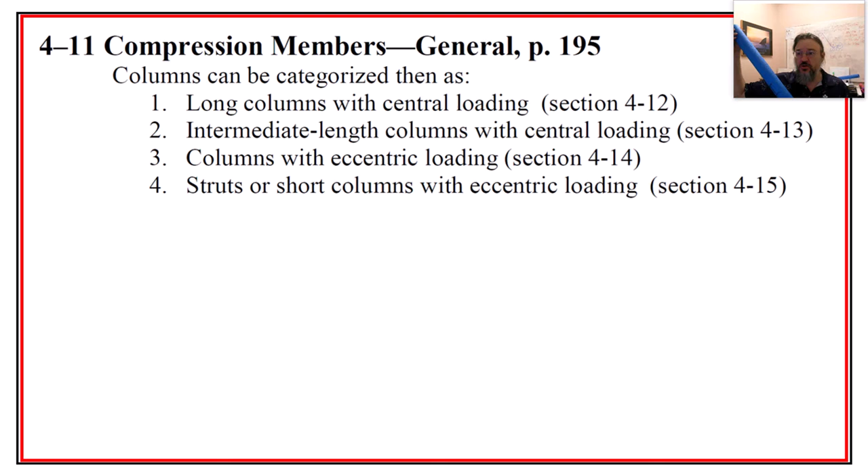So we want to see really between 1, 2, and 4, 3 categories of columns. We got really long ones, we got kind of in the middle ones, and 4 is little squatty ones. And we don't really do much with the squatty ones, but we should just realize that we could categorize them in 3 different ways. But this is the way that the chapter in section 4-11 treats the thing.

We start out with the concept of stability. This is something you probably already inherently can relate to, right? Almost everyone, when talking about stability, has this little marble. It's in a ditch, right?

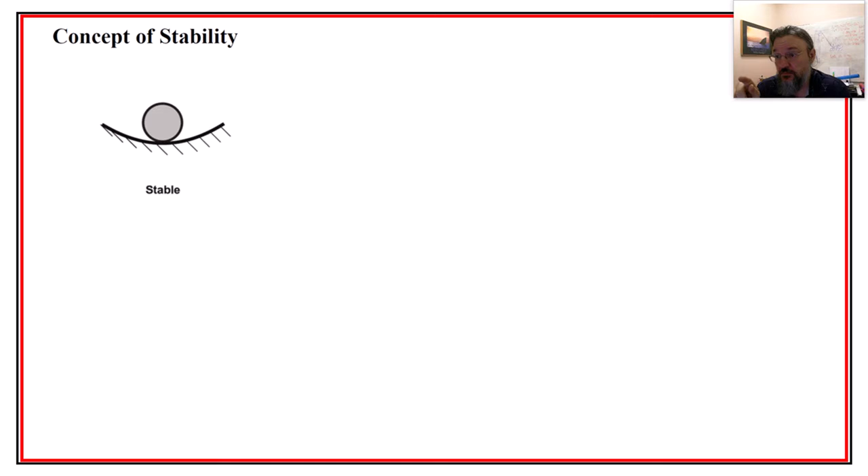And if we nudge the marble, give it a little push, it's going to roll up, it's going to roll back. And if there's some friction involved, it'll eventually stabilize and go back into its position, right? So the nature of the problem is a fundamentally stable position, because it'll self-correct. A small action produces a small effect. That's something that's stable, right?

Now here's the counterpart, the unstable situation. If the ball is now, instead of in a ditch, it's on a hill, right? If we just give it a little tap, or a fly comes and lands on it, it's going to go crazy, right? So a small action produces a large effect. That's the idea of stability.

When we take it to buckling, I think another good example is your knees, right? If a larger friend was to decide that they wanted to do chicken fights, they get onto your shoulders, and now you got to run around and fight somebody else. But if that person's really heavy and you tried to stand, you could lock your knees. But the heavier they get, at some point, boom, it's gonna buckle, right?

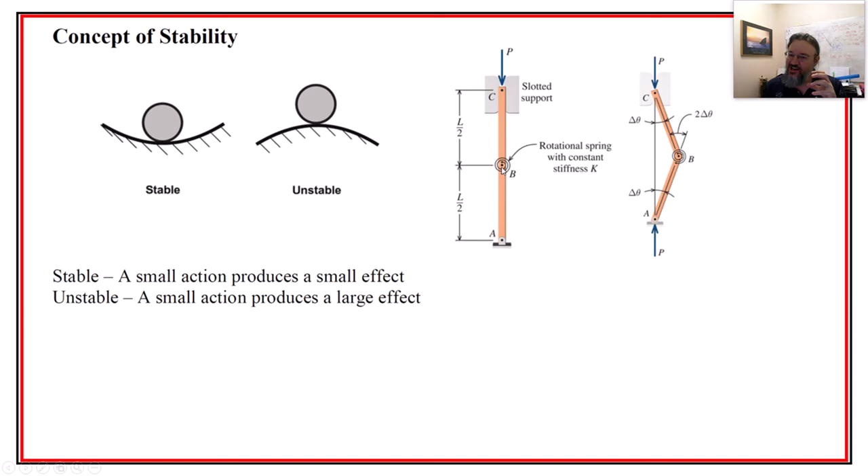So you can think about your leg buckling, right? It's fine, but with just enough weight, it goes. You can think of it like you have this little rotating spring, kind of stiffness in your knee, and you can kind of get that sense. We can figure out that at some point with a little tiny displacement, if you were to bend your knee just a little bit, it would buckle a lot sooner.

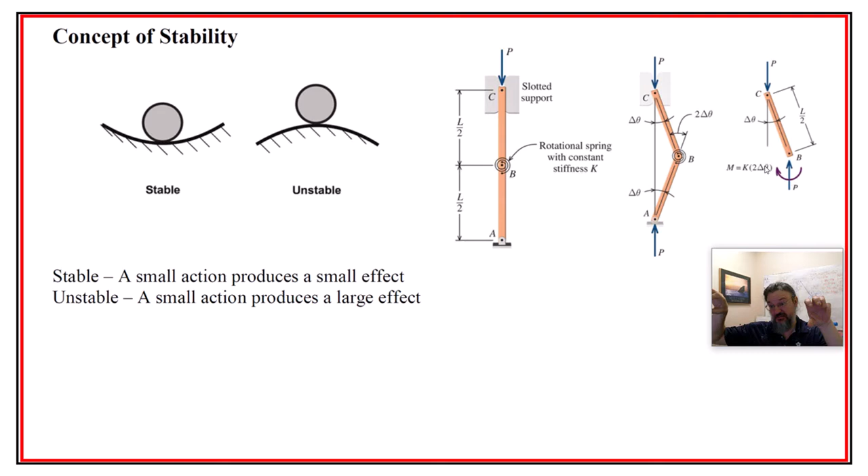That's because there would be a moment created between the deflection and the force. If you do a free body diagram, you'd see that itty bitty amount of deflection creates a moment arm, and that's trying to bend your straight leg, kind of bending it, because if you look at just one side, the force is going this way and there's a little tiny displacement right here. Okay, that's the concept.

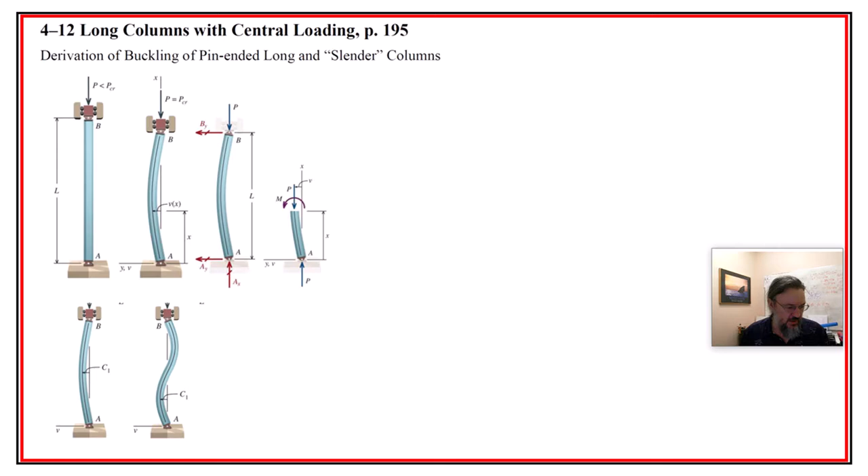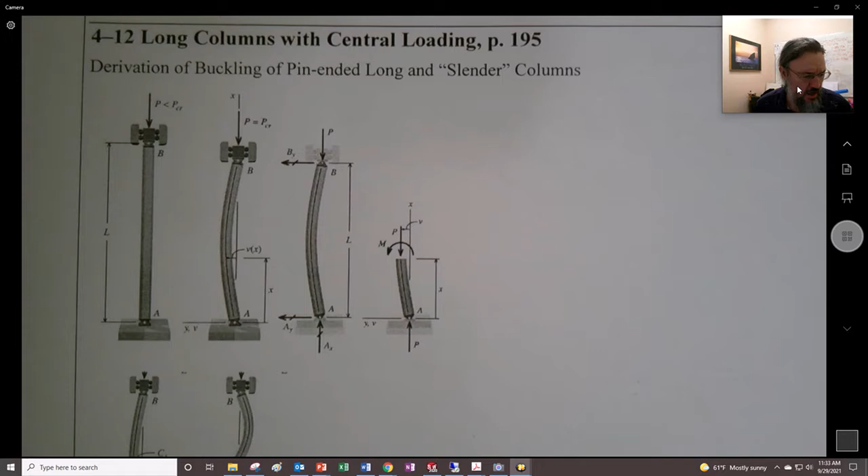But now we've got to put some mathy stuff into it. We have a good friend we introduced recently, called the Flexural Equation, and it's going to come up and be relevant again. So here you go, here are my hand notes, let me go through this short derivation. This derivation is in some ways a rite of passage - it's one thing where we can say, why did we learn differential equations, and why did you bother bringing up the flexural equation?

We did a little brief derivation of the flexural equation, Euler's equation, right? And I got this little thing pointing right at me - I'll take that out of my nose.

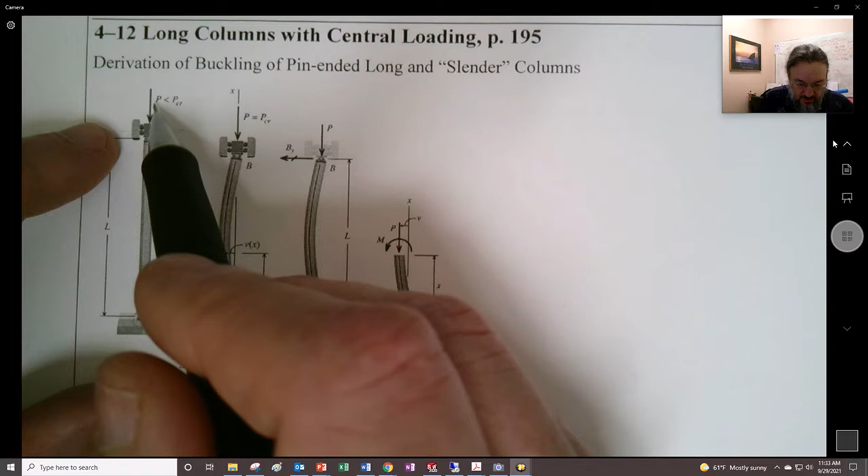Okay, so we have this column situation, and it's pinned down here, and pinned here, but it's got rollers, so that means the thing can't go left or right or into the paper or out of the paper. It can only go up and down, and it's pinned right in there, kind of like just held at a point. So there's no moment at that top point, and the same thing is true here at the bottom. So if you just press downwards, this top thing won't go side, back and forth, it can only go up and down.

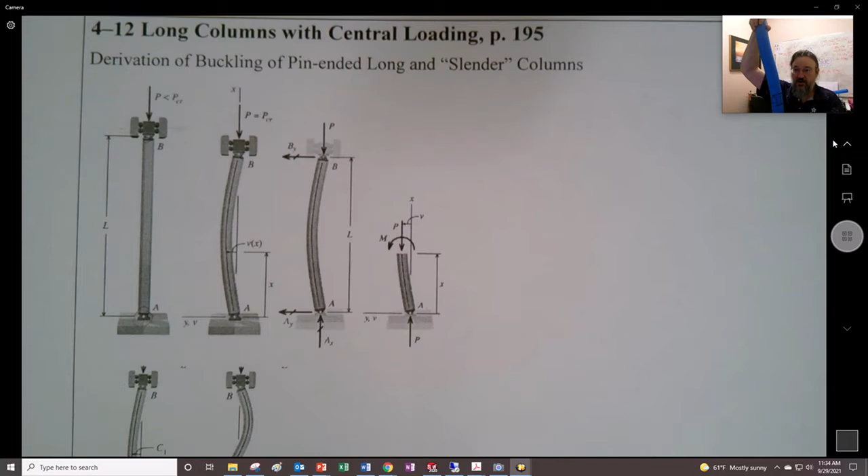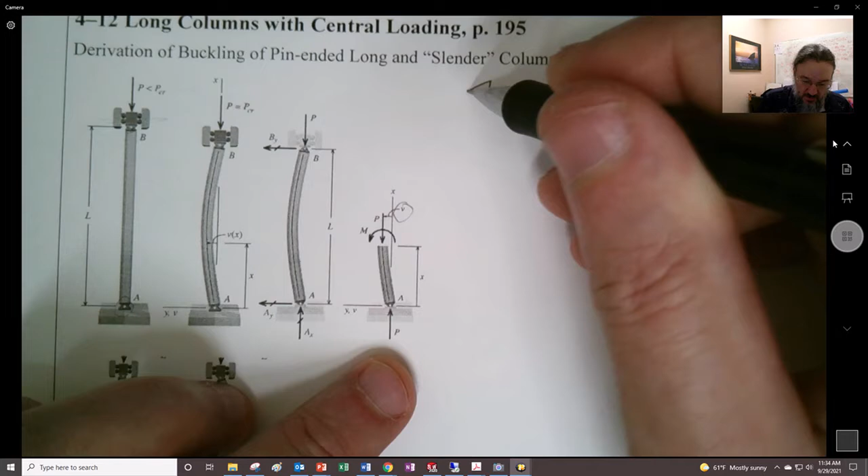So as you push right there, this thing is pinned, so there's nothing holding it up here, it's just held by a point. So let's just assume it buckles, and we could do a free body diagram here. They decided they were going to call V, in this book, the displacement. So we're doing an FBD of this, and we take the sum of the moments, and it's got to be equal to 0.

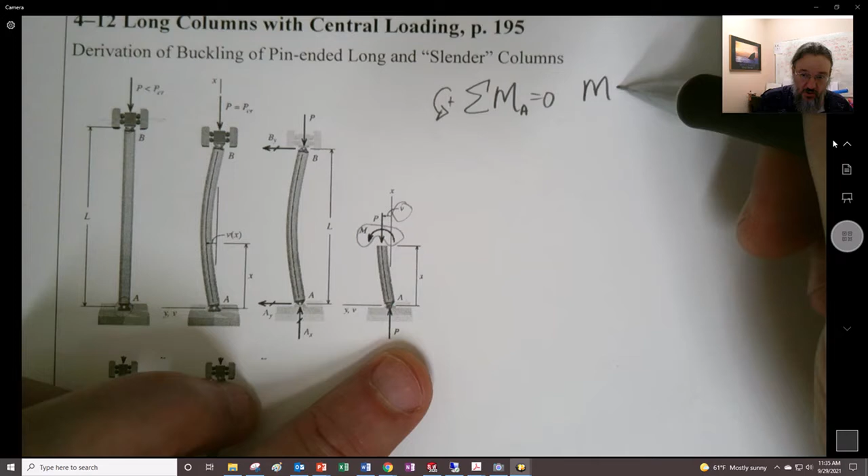So we have a moment on here, and we could figure out what that moment is. If we're taking the sum of the moments about A, that moment up here - they decided to go plus right here. So instead of going plus and minus as a sign convention, they just say this load P is going to be multiplied by the displacement, which I decided to call Y just because I liked Y better. So here is our Y coordinate right there. Instead of V, I'm using Y, but that's just the displacement at this hypothetical point being bent. We don't know any of these values yet, but we know this arrangement has to be true.

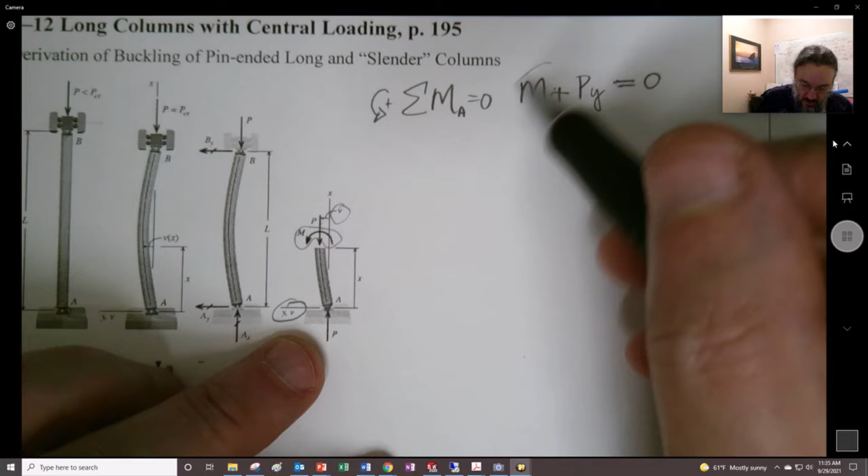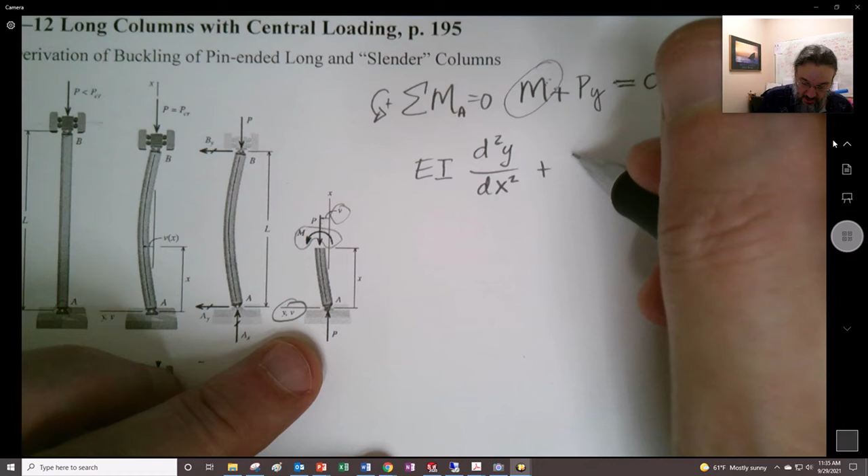Well, what we could do for this moment is replace it with our good friend, the Flexural Equation. Recall that this is the second derivative of that deflection with respect to its axial position, plus Py equals 0. So what we've just done, from an FBD and the Flexural Equation, is set up a second order differential equation, and we usually like to arrange it so that we get rid of anything on the front side of that.

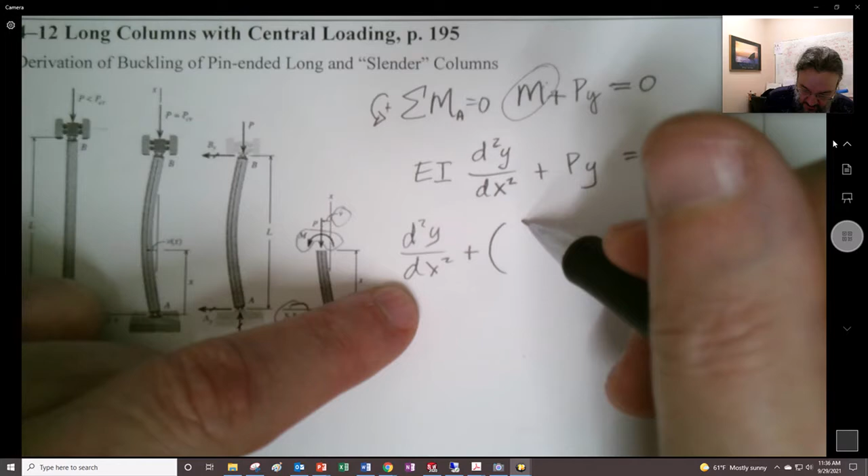And I'll put this in parentheses, go P over EI, y equals 0. Now, the reason why you take differential equations is so that I don't have to teach it to you.

But we know the solution to this very fundamental second order differential equation, or I hope we do. But I will teach you the thing that made it most clear to me when the light bulb came on and I understood what we were doing in differential equations. I made pretty good grades in undergrad, but I didn't really understand it.

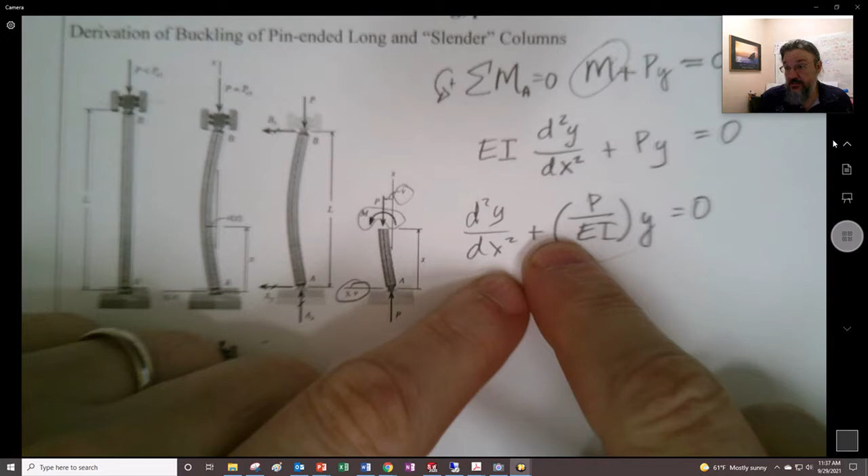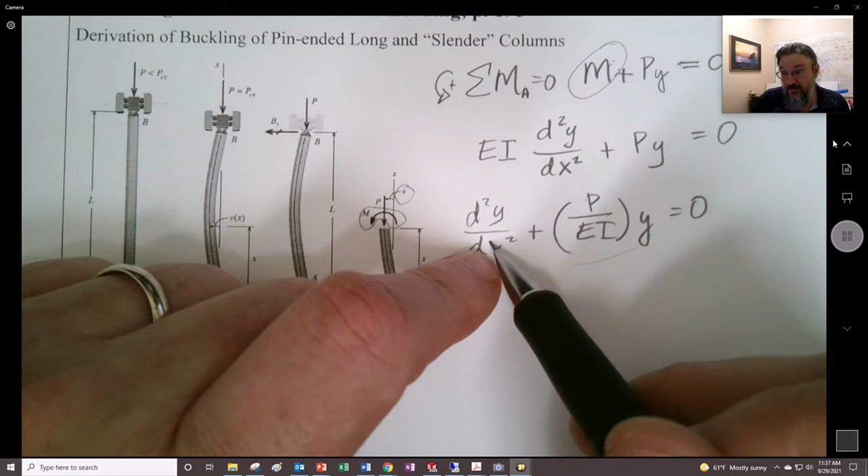It was when someone said all differential equations is a mission to try to figure out what kind of thing does that. When you have the original thing, but then you take the derivative of it twice, when you put them together, it will turn into 0. What kind of thing behaves that way?

And the answer is it's a sine function. When you take the second derivative of a sine, you get a negative sine, and you add negative sine and sine together, and they equal 0. So if you have something, y equals sine, with some good junk on the inside next to the angle thing, and you take a derivative of it twice, and add it back to the original thing, it's going to cancel out. It's going to go to 0.

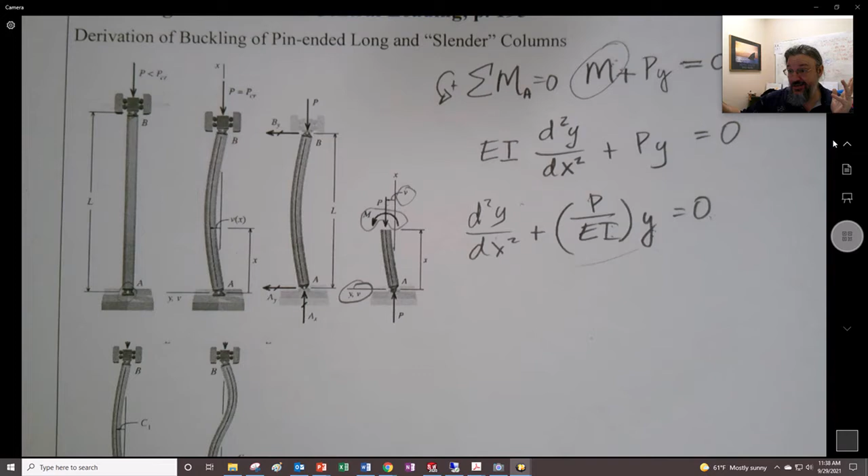Well, a cosine will do that too, but a sine and a cosine are actually the same thing, just shifted over 90 degrees. Or you could even say e raised to the something, with an imaginary number in the exponent. When you take the second derivative of that, it will be negative e to the thing. Add them together. But it turns out e raised to the imaginary number is actually a sine and cosine added together. They call it the Euler equivalency.

So they're all the same thing. They're all a sine function. It's the only thing that exists in this world that when you take the second derivative of it and add it to the original thing, it will cancel itself out and turn to 0. So it's the only solution to this that's possible.

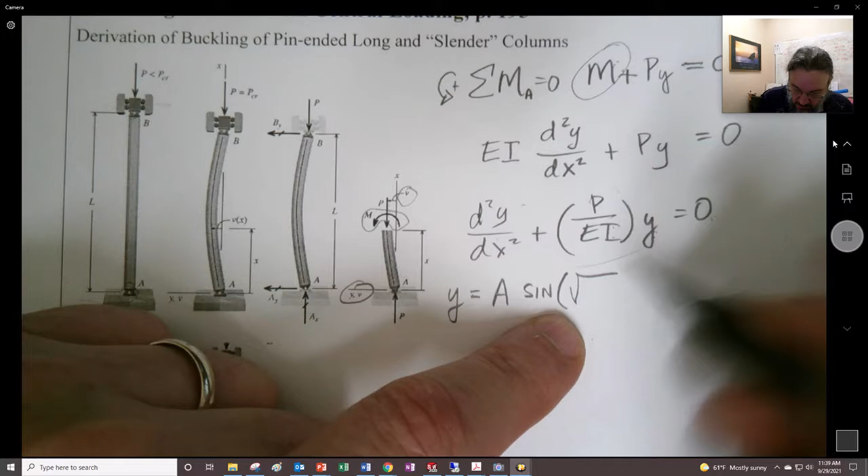Now, as a general solution, what they like to do is cover all the bases. So we stick a magnitude in front of this, and we take the sine, and this has to be the square root of it. It's got to be the thing on the inside, because it's going to fall out when you take the derivative of the thing twice. It's going to be multiplied by itself and become this, so it's got to be the square root of P over EI. I hope what I said had some amount of usefulness to someone out there.

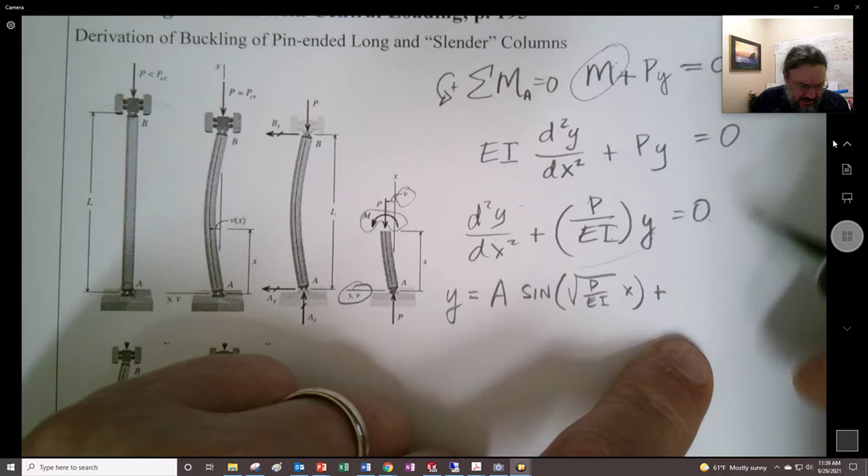So anyway, it could be a combination of a sine and a cosine. It's possible in lots of different scenarios where this could be a thing. So this is like a generalized solution to a second order differential equation, but we could start making it a little bit more specific to our situation.

And the way that we do that is with boundary conditions. We say we know at x equals 0 that it's not allowed to deflect in the y direction, that y is equal to 0. And if we say x equals 0 right here, if that's true, this can't be true, because cosine of 0 is going to be equal to 1.

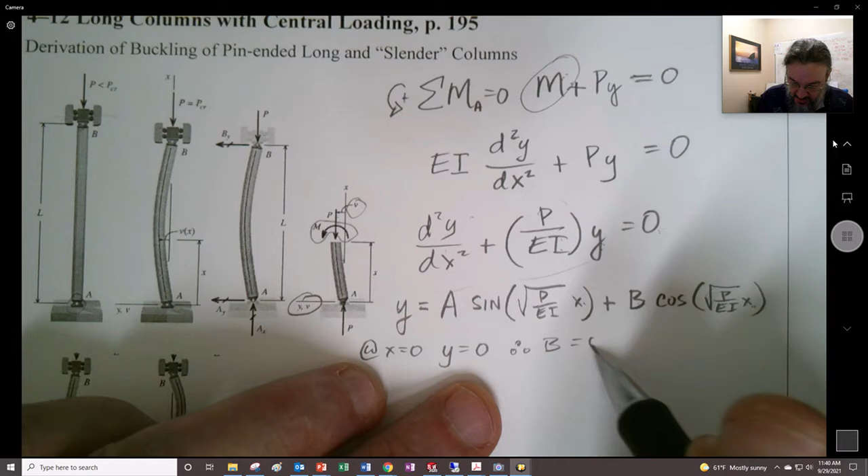So that's b. But if we take the sine of 0, that's going to be 0. So we have a situation: if we put 0 in here, it becomes 0; we put 0 in here, it becomes 1, and this has to equal 0. Therefore b must be equal to 0. That's the only way it can happen. We don't have any choice. It's just a fact. It can't be.

Okay, so all of a sudden, we got rid of the cosine. That was nice, we didn't want it anyway. And then we have the other boundary condition, that at the length of the thing, all the way up here, at x equals L, y also has to be equal to 0.

Right? So when we do that, for the only way that can be true, it is not going to help us figure out what A is, but it will tell us that the inside of this thing right here, when x equals L, has to be some multiple of pi. Now, one of the solutions is possible, is that the square root of P over EI times L could possibly equal 0.

Square root of p over EI times L could be equal to 0 to achieve this, but that's not possible. So that's not a solution.

Another solution is pi. Pi is the thing that's when you're inside here, right? So it'd be this right here, when you put it together, could be 180 degrees. That would make sine 0, and then yes, it would obey this thing right here. Another is it could be 2 pi, right? It could be 360 degrees.

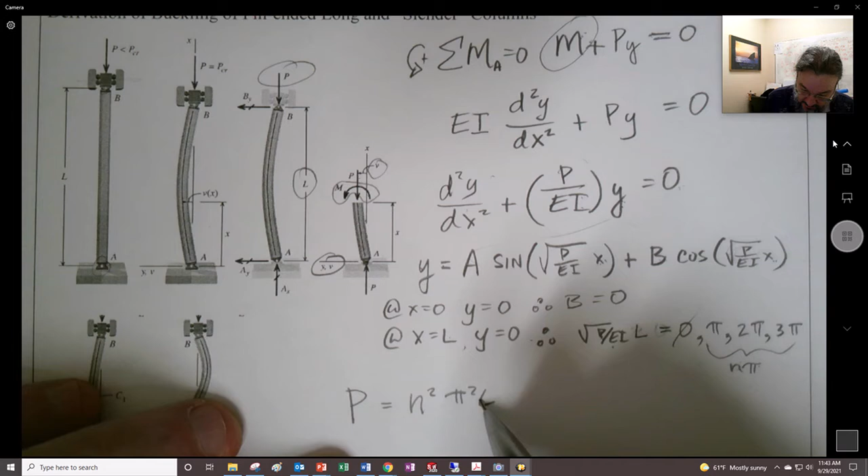So do I want to bother with this? I guess I could just say here, we say that p, I'm going to solve for p, because that's the thing I'm about to know. When does it buckle? I want to solve for p. And what I end up finding is I got n squared and pi squared, and I have EI, and then I also have L squared right here.

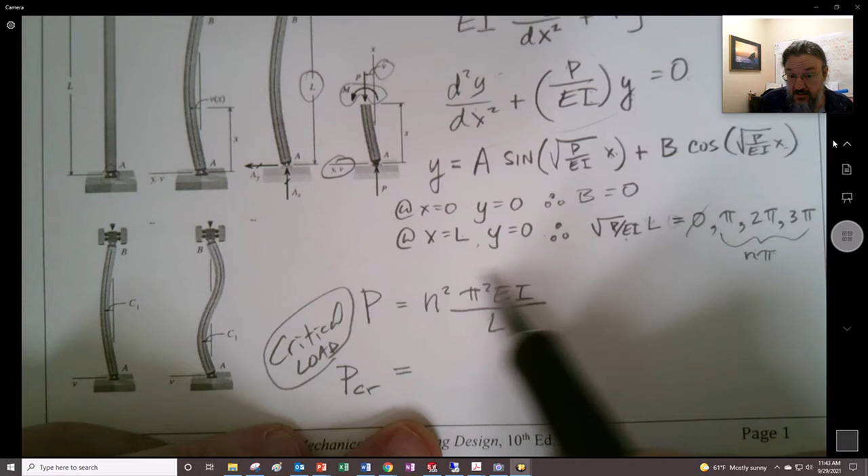So this says PCR, we're going to call that the critical load. And that critical load is now going to say, okay, so one thing that we do know here is that when n is equal to 1, this is going to be the smallest load possible, the smallest load at which this thing fails. And so we get pi squared EI over L squared.

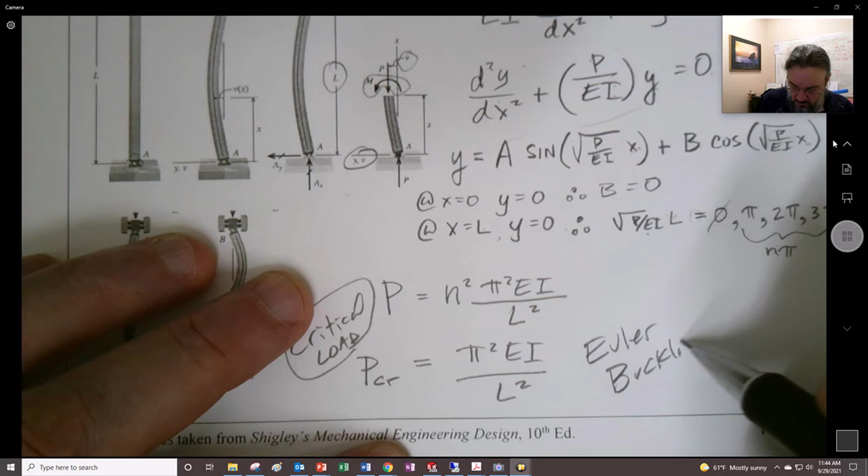Okay, and we're almost done with this video, and we'll move it on to the next one. But this was just for this pinned boundary condition. So by the way, this is the Euler buckling equation, or we call it Euler buckling, right? We're going to add something to this just to make it a little bit more useful in other situations.

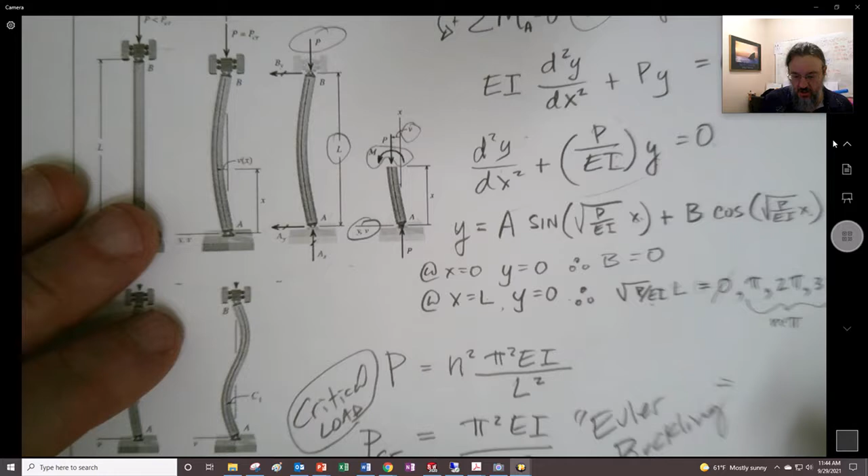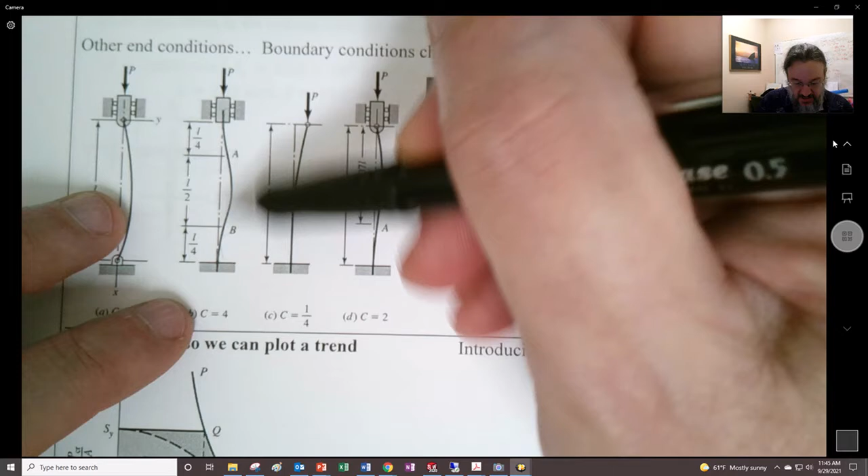So these boundary conditions that we had right here might not be the only boundary conditions. We could take a look at these particular types of things. So here's the boundary conditions we just did, but they might be fixed at the top, right? So they might be fixed in such a way that this thing can move up and down, but there's no moment. So one of the conditions is now the slope has to be 0 here.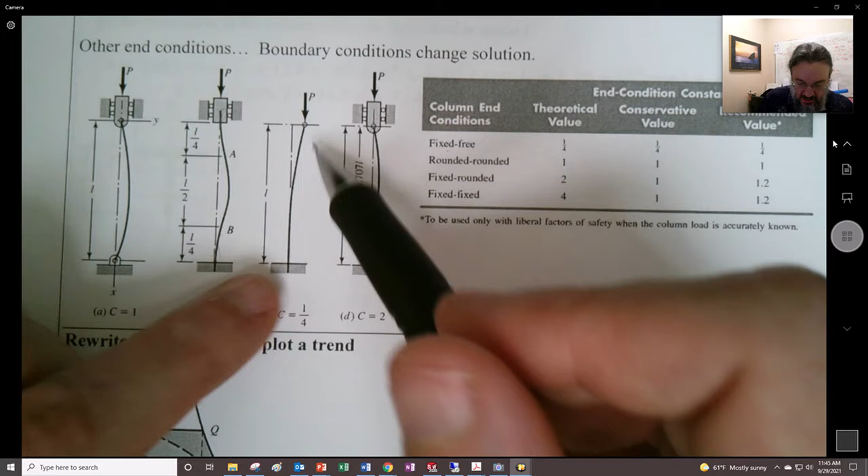So those are boundary conditions that could exist, right? We could also have one where this thing is allowed to go side to side, but the slope has to be 0 back down here. And then another one where it can't go side to side, but so this is pinned fixed right here. So we have fixed free, that's this situation right there, fixed free.

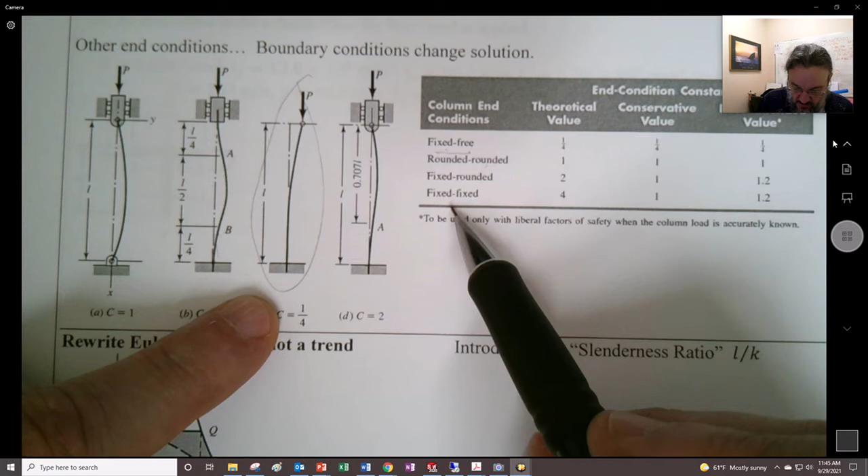We have, they're called rounded. I'm trying to think of what the heck they mean by rounded. I'm trying to see where's rounded. That's just occurring to me. Like, I think that's pinned. Yeah, that's what that is. That means pinned, which is this is the typical situation that we have, pinned.

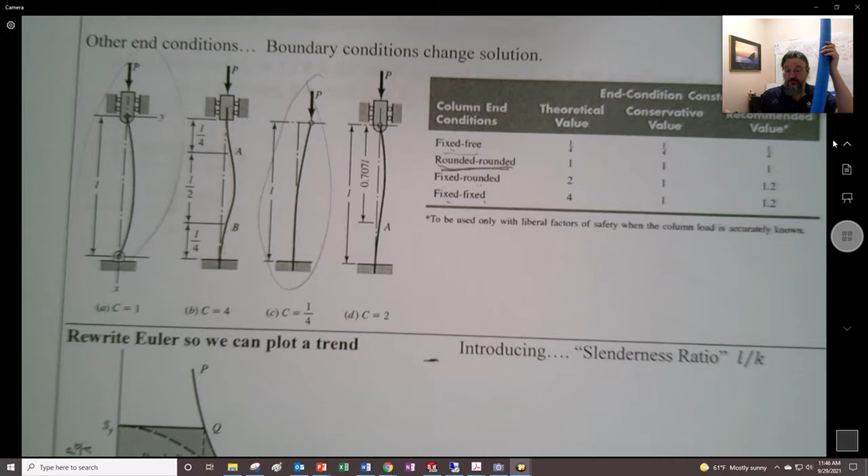And then we have fixed pinned, that's this guy. And then we have fixed fixed, which is this guy, right? So let's see, fixed free, you can think of that as just cantilevered, right? That's just this thing, and you put a force and it can go over to the side, right? But the base is held fixed, it's cantilevered.

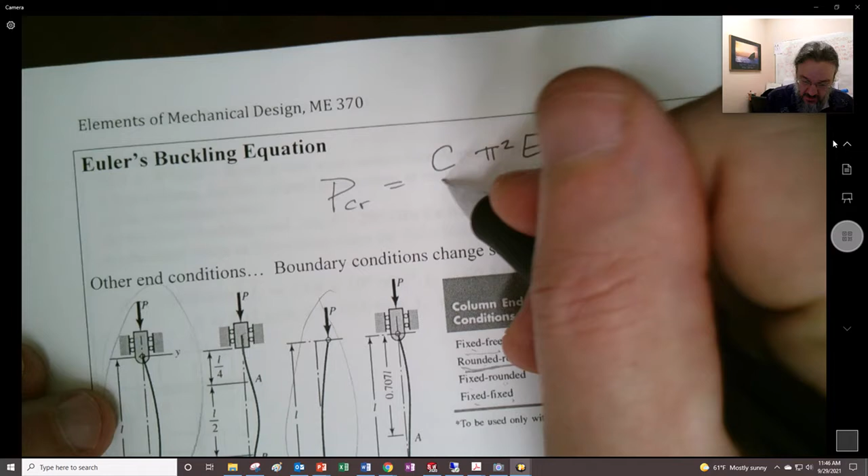All right, so these are like end conditions, and we could have come up with some things for boundary conditions, but we'll just accept that the critical buckling load right here is going to be equal to some C that we're about to just talk about, pi squared EI divided by, I'll keep it capital letter. And by the way, in Shigley, this is equation 4-43. This is Euler's buckling equation.

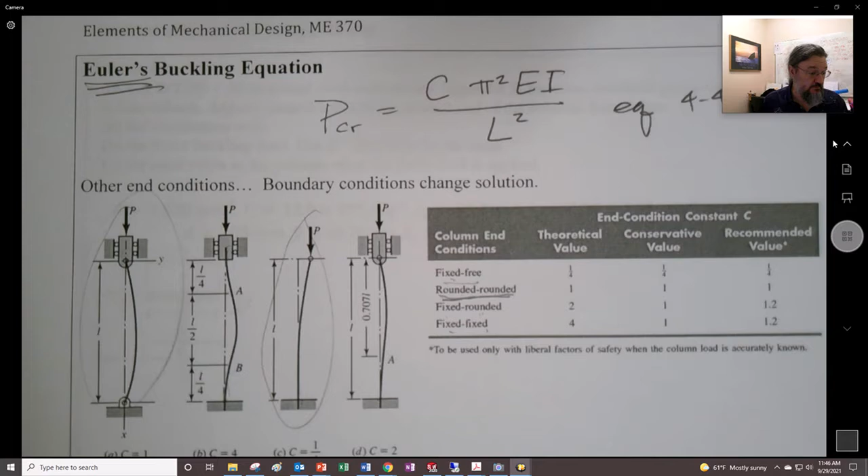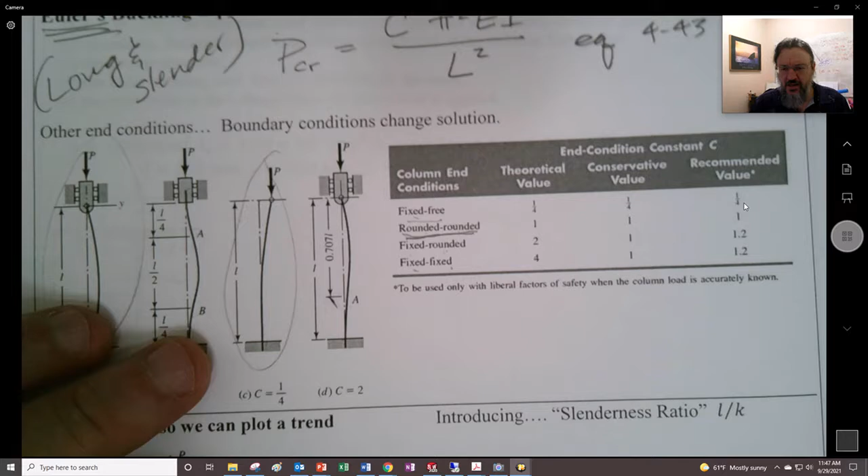Let's see, do I want to bring up the next things? Yes, I do. I think I will, and then I'll go to an example because it isn't much longer. Okay, but this is for long and slender columns, right? So really, really, really long. We might start to back off, and we can.

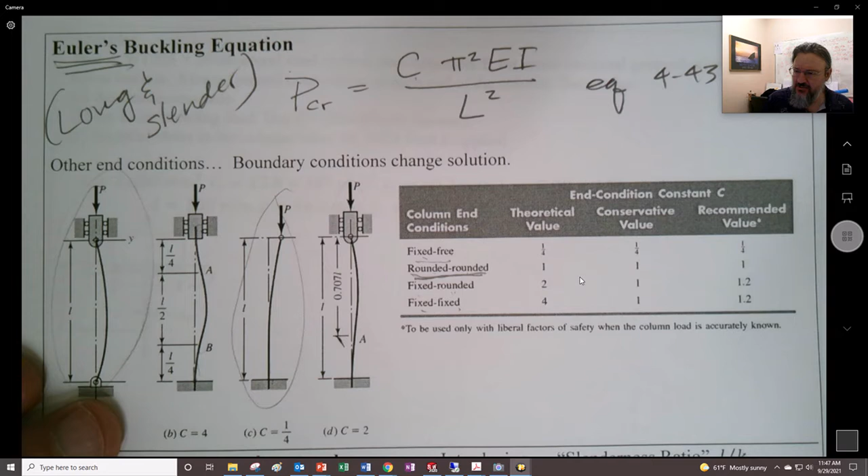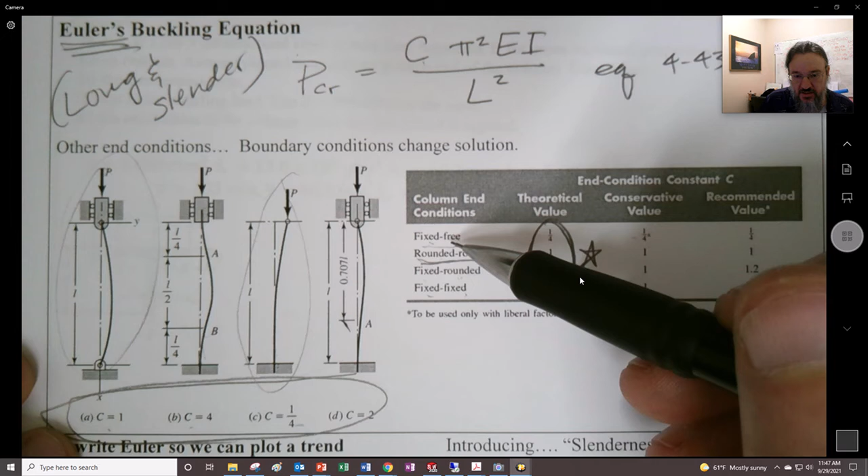Okay, so another thing, this is not maybe the most favorite. Well, I should mention what C is. I should edit this video, but I'm going to keep going. The C is a factor that accounts for these different ones, and you could see, no pun intended, what they should be, right? So let's talk. These are the theoretical values, and for us, these are the ones we're going to actually use, right? These others are like, okay well, just here's like, this one is an important one because the fixed free will buckle quicker than the other ones, so we stick in a value for C.

That's going to make it 1/4 of, like, let's say this is our generic go-to pinned column. This is the one that the equation came from, right? So you see that C is equal to 1. But we have other situations here, and we'll talk about them.

Maybe I should talk about them now. We could talk about... no, I'll talk about it in a second. It makes more sense in a second.

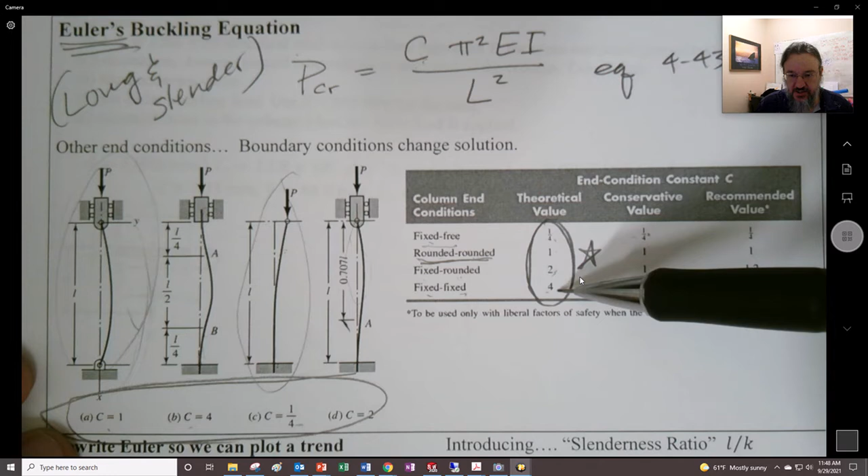So the fixed-rounded, which is this guy right here, we'll see that we use a 2 right in there. And then for fixed, we use a 4. So fixed is harder to buckle than pinned, 4 times as hard to buckle. That's what we're learning from there.

But we could plot like a trend, right? So we could actually plot out Euler if we introduce something called the slenderness ratio. Going back up to here, we see that we have the length and the moment of inertia. So these are really geometry things. And so we could introduce something called the slenderness ratio, right?

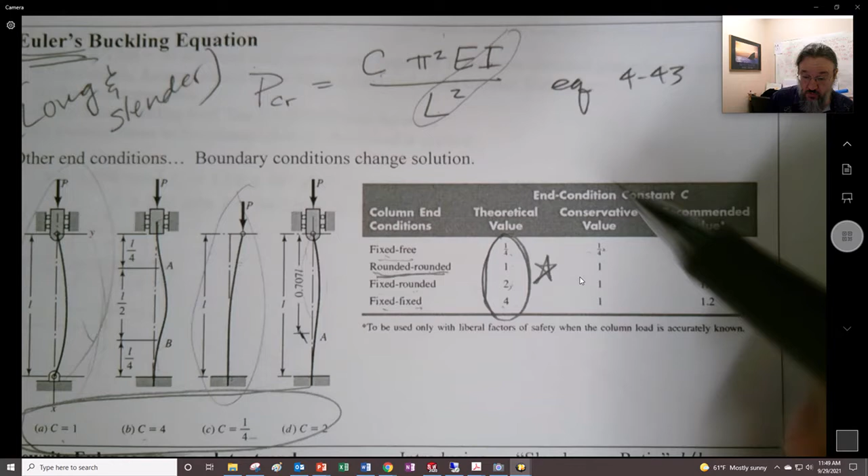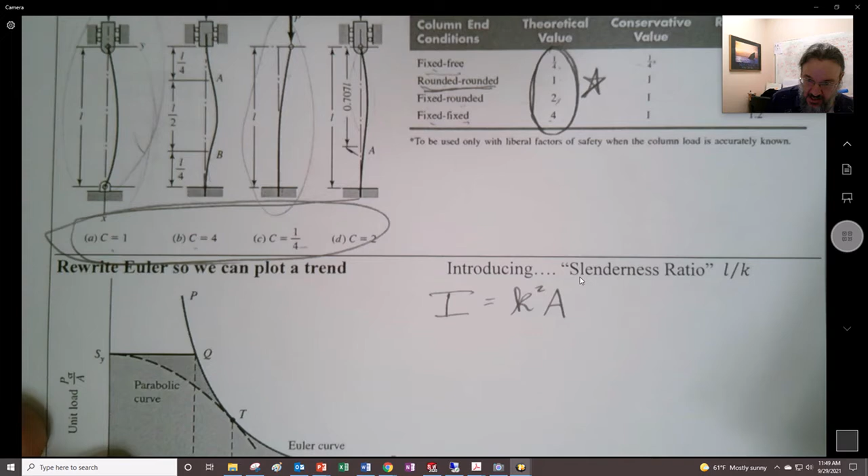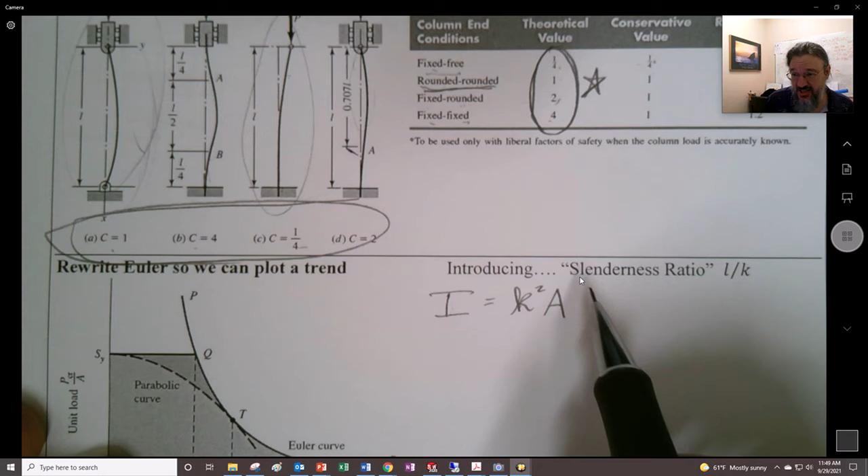So we also want to recall that we had I. Another way that we can think about moment of inertia is something called the radius of gyration. Unfortunately, not every book uses the same variable, but this book and many others use K as the radius of gyration. As a refresher, the moment of inertia can be expressed by K squared times the area. These are both cross-sectional properties, so we introduce another cross-sectional property, which is the radius of gyration.

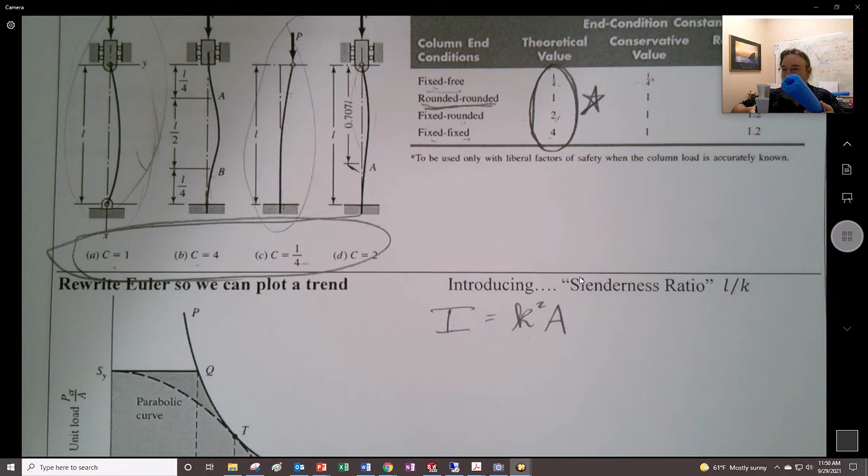And that's really just a useful way of describing the section properties, right? We could think of the area as how much material is being used, and that depends on what the shape of the thing is. We could say that maybe this has the same area as this, but these are going to have different moment of inertia properties, right? They've used the material differently. Hypothetically, these have the same cross-sectional area—they don't, but let's just say that they do—and one's going to bend easier or more difficult than the other.

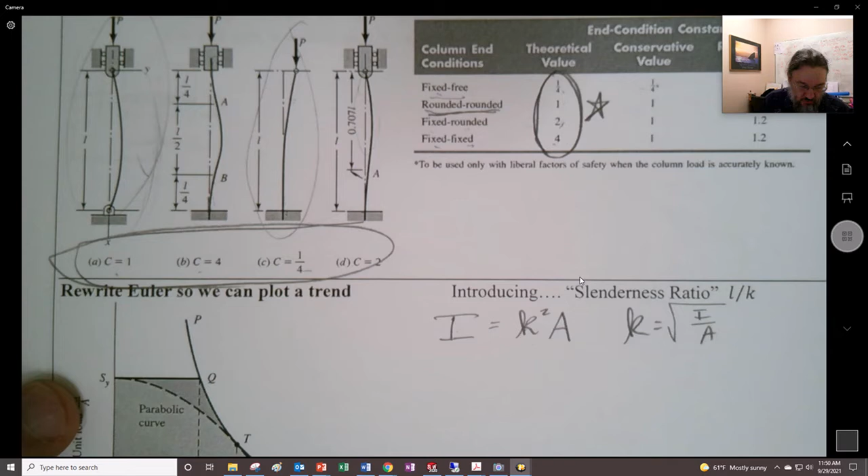So we could use this K as a means of saying that K is equal to the square root of I over A, right? But we just want to remember that's the radius of gyration. So we can replace that inside of our buckling equation up here—actually, replace it inside this one right here.

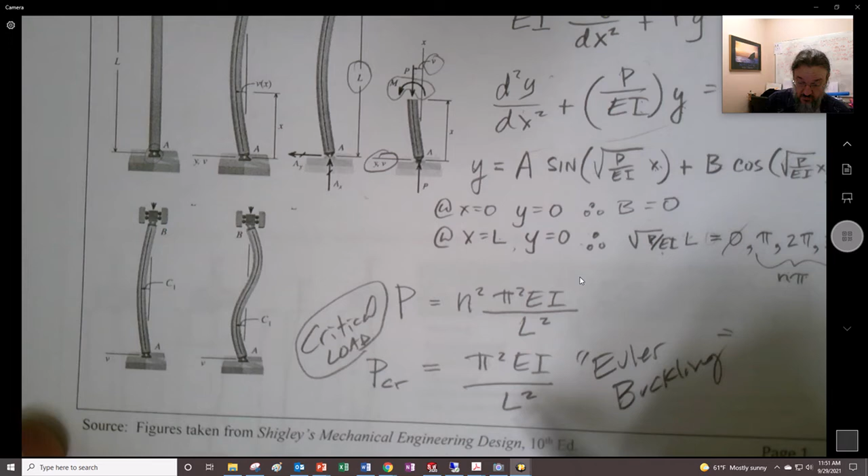And come up with this thing we call P critical now. I guess we did keep the C in there—I guess I will keep the C in there. And then go pi squared, and now E, right?

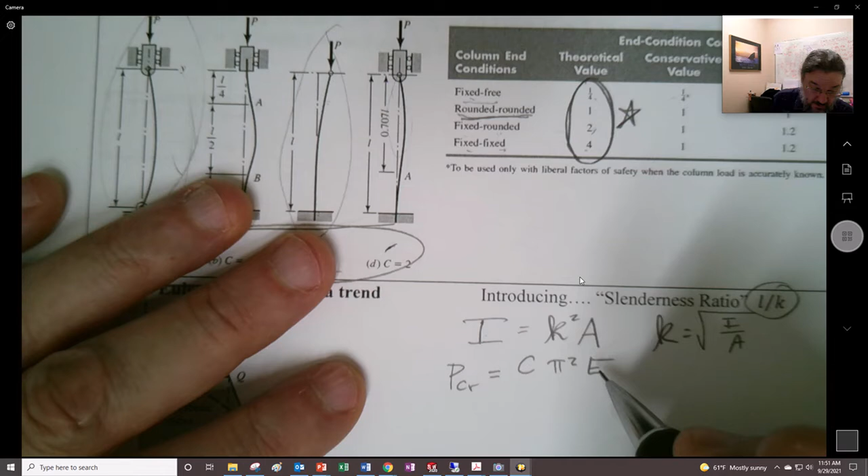But we're going to introduce this thing L over K, right? So we're replacing in this equation L over K. So we have these two together. And I don't think I did the algebra anywhere—why didn't I do the algebra? Anyway, you could take it on faith, or you could do it right here, that it's going to end up being L over K squared.

And we need an A—oh, we need an A over here to be able to do it. But I decided we're going to divide this by A over here. I should really show it, it'd be a lot smoother. This would have gone a lot smoother if I had done that. Oh well, maybe I'll do that in class.

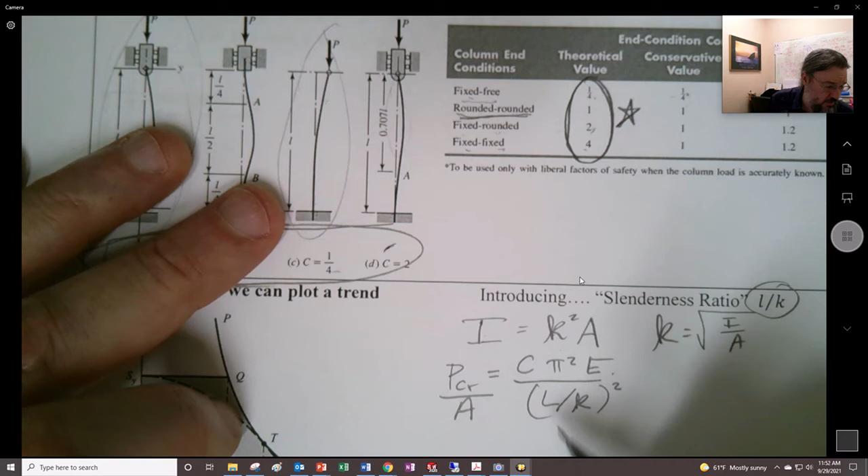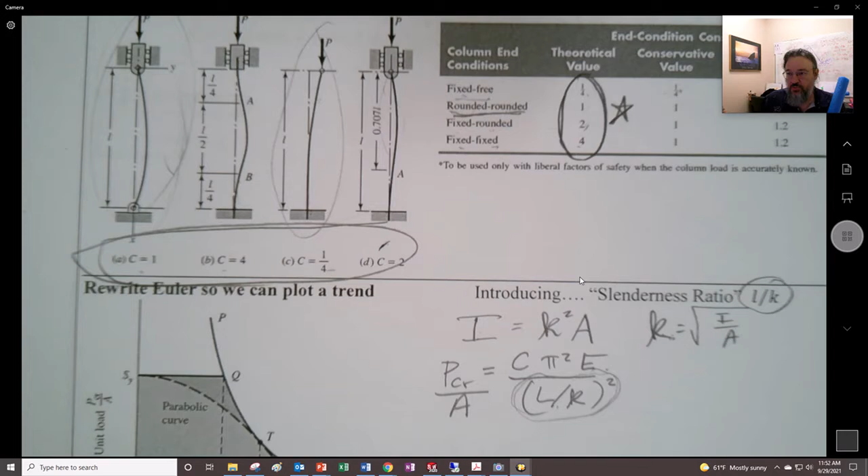But anyway, what we could have right here is this parameter called the slenderness ratio. The longer a column is, the more likely it is to buckle. And the larger the K is, the more likely it will not buckle—so it's like the inverse right here. These are two parameters together that decide whether something's going to buckle or not. The larger this ratio is, the more likely something is to buckle.

So we can plot this L over K—they're using lowercase L's, and it looks a little bit like 1, but it's actually L over K right here. That's the slenderness ratio, and the larger this is, the more likely it is to buckle, which means the lower the critical force has to be. But we can divide that by the area right here.

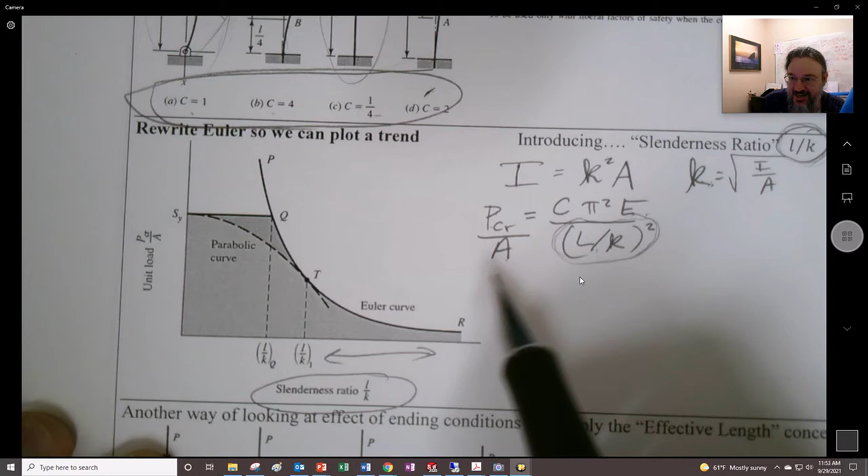And then we can kind of think of it as—so they're calling it a unit load, but we kind of think of it as stress, right? We could say that here's some stress that we're putting onto the thing, and at some point it's got too much stress and it buckles, right?

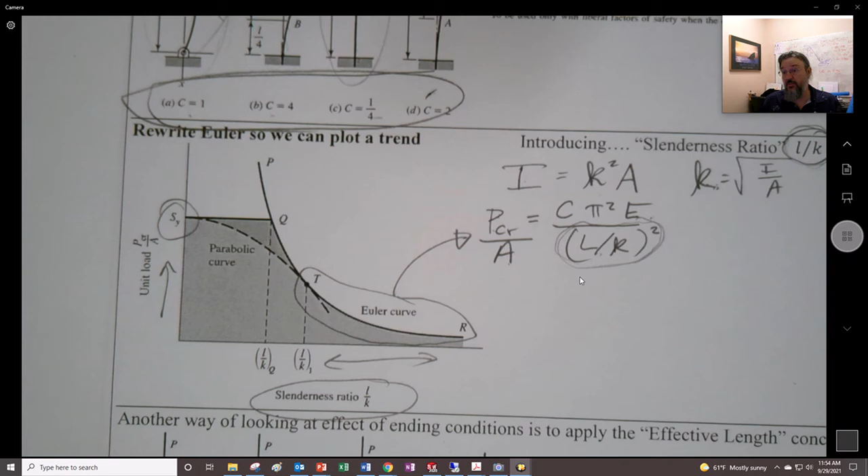So this part of the curve that we're showing is this. But something else we want to consider is that at some point, if we keep going up here, we're eventually going to get to the material limit, right? So then we can't go any higher. Well, someone named Johnson created this little curve that joins the two things.

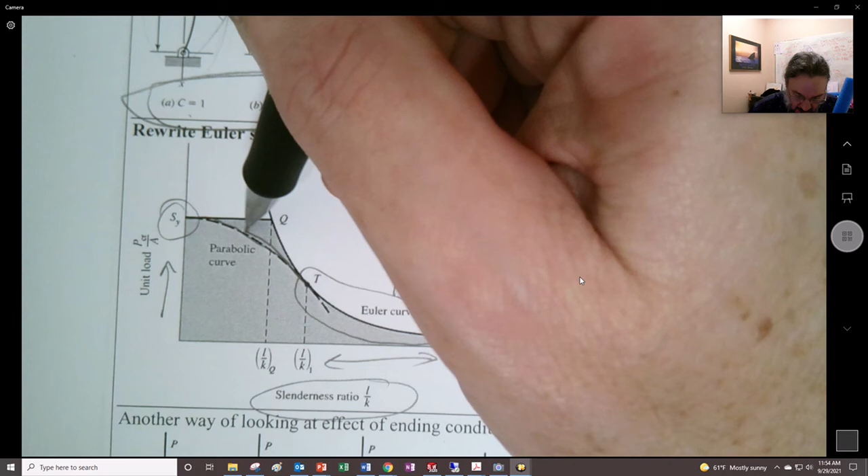So in this region, which we'll cover in a subsequent video, this is the Johnson buckling curve.

So we say that this is the Euler curve right here, and this parabolic curve is really a curve fit between Euler and this point. At some point we make a transition, and over here this is the long and slender region.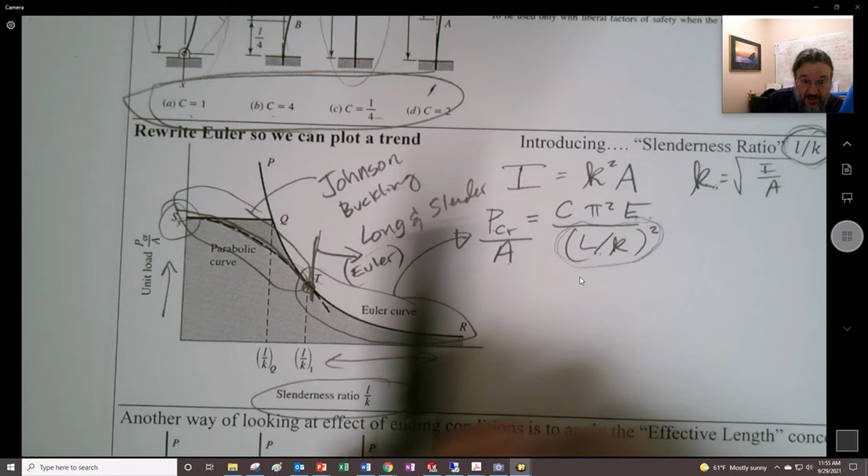This is going to be the transition point, and we'll talk about that in a subsequent video. But this is Euler right here. The Euler buckling is for long and slender columns, everything to the right-hand side. Everything to the left-hand side, we assume is Johnson buckling. We'll find that there's a limit where it doesn't really make sense.

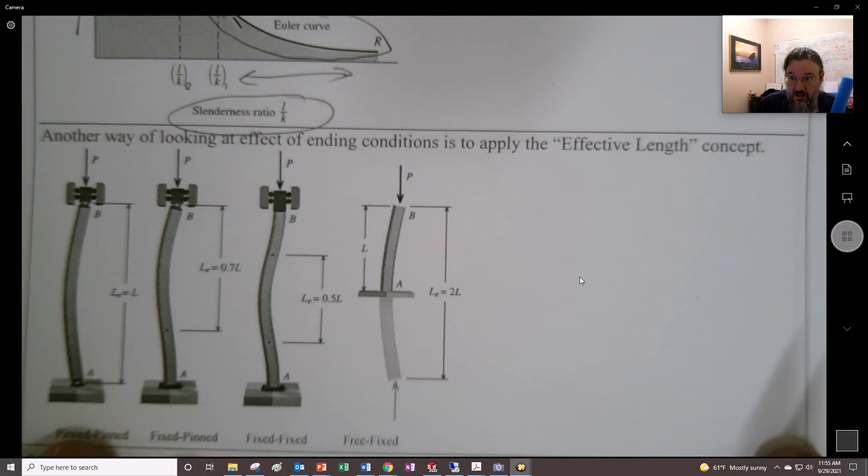And that's where the squatty columns come into play. Now, one last thing — I made the video too long, I didn't mean to — another way to approach finding this critical buckling limit.

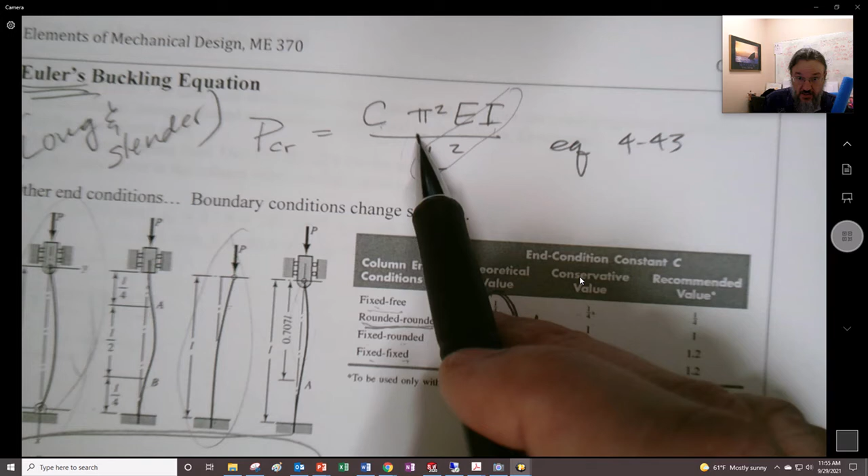Well, that's zooming back in and out right there. Let me put something in there that can focus on, or is it just going to go wacky? Okay, instead of doing this C right here, so it's the same thing.

It's just an alternative way of approaching this, which is to come up with the idea of an effective length. So instead of using equation 4-43, what we could do is have an LE — this is the effective length.

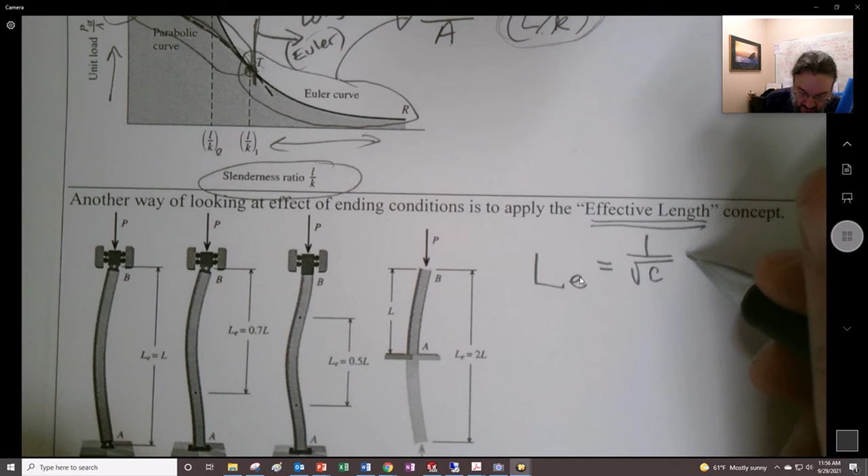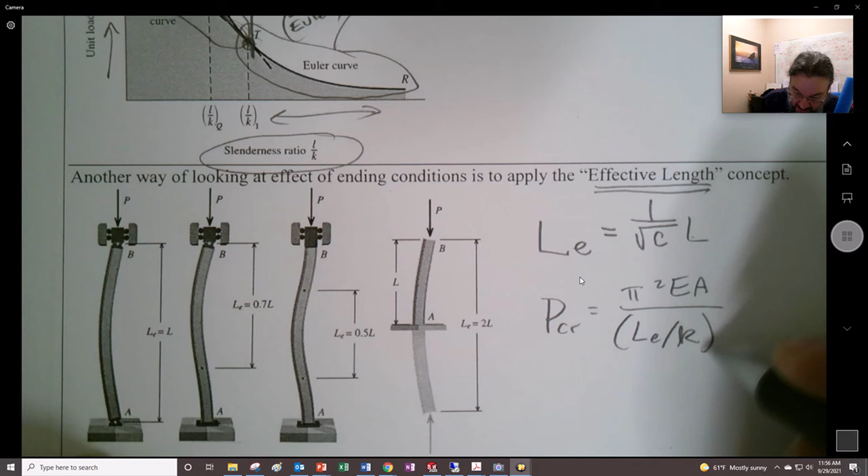And if we want to make a transition from that table we were given, we take 1 over the square root of C and multiply it by the length. So the P critical is pi squared EA over the effective length divided by K squared. Here's the effective slenderness ratio squared.

So this is an alternative method of doing the same thing, and it's quite common because of this figure you see in another book where you have pinned — the effective length is equal to L.

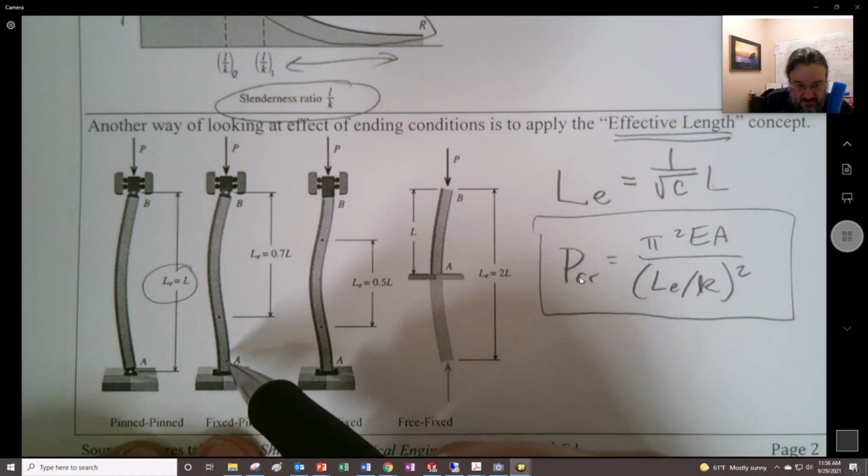Here, let's put that to the side for a second, but look at this one right here. If you were to cover this stuff up, wouldn't that essentially look like that? Look at the shape of this thing — from right here to right there, it looks like it's pinned.

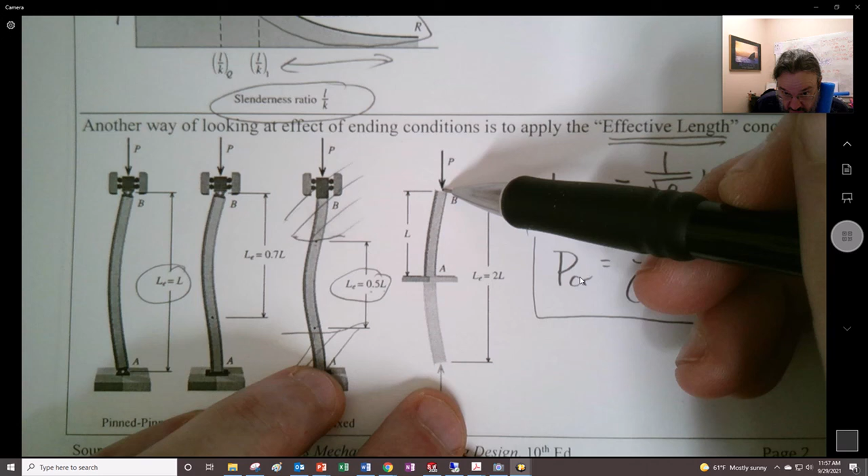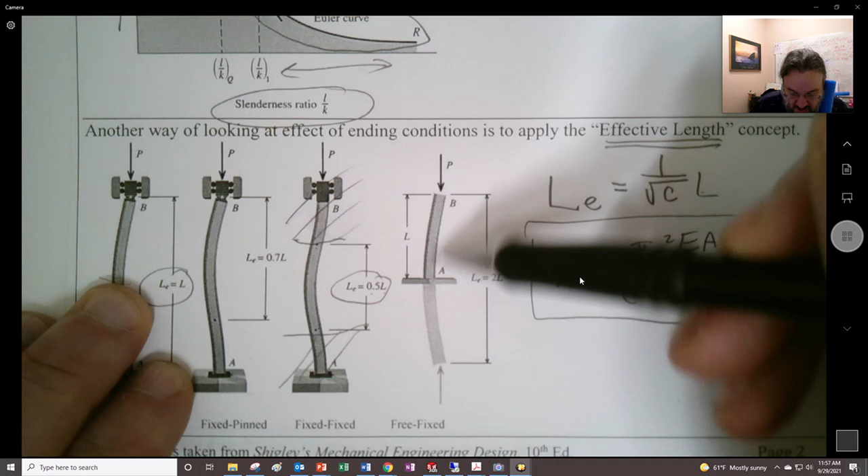So here the effective length is actually 0.5. And then take a look at the fixed-free case. Here's fixed and free. It's as if it's the mirror image from here up — or only half the image is this part right here, so it has this kind of mirror image down below.

So the effective length is 2 times L. Looking at these two different situations, you can get the idea of why you would want to use the effective length as opposed to using that factor.

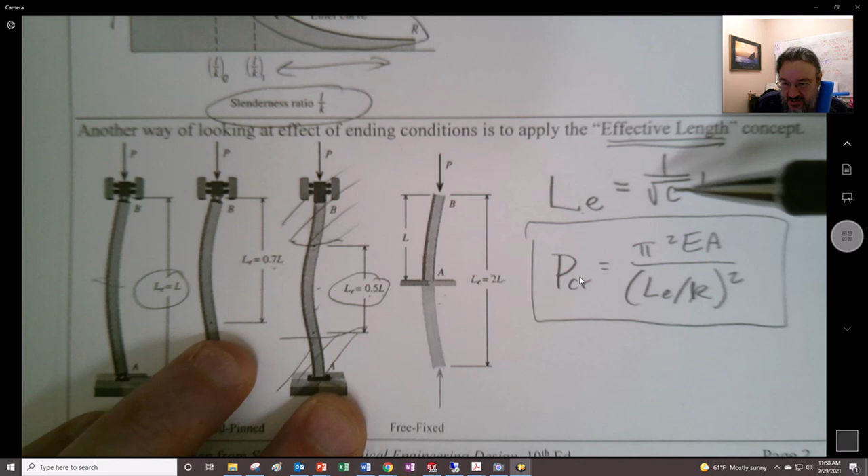And then this one right here turns out to be 0.7 times L. I think this would actually be 0.707, from the derivation of the thing, because you'd see the square root of C coming up right here.

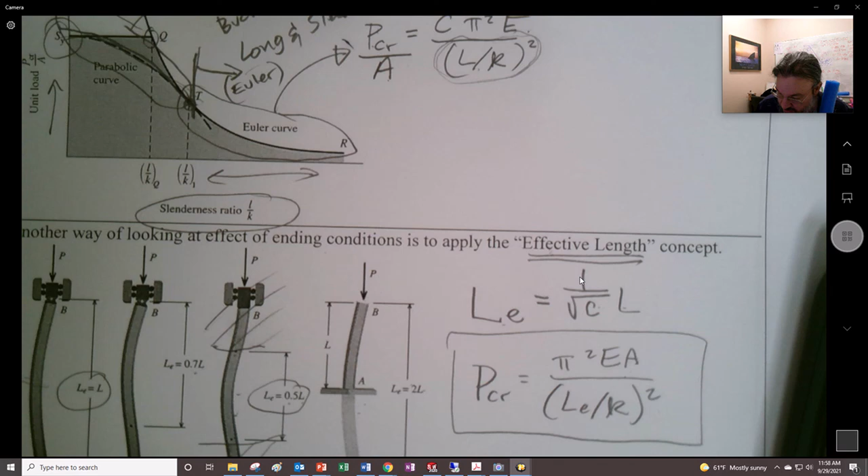So if you were to look at the fixed-pinned case, the C for this thing is 2. So you would take 1 over the square root of 2, and I'm pretty sure that's going to be 0.707. Sure enough, it's 0.707.

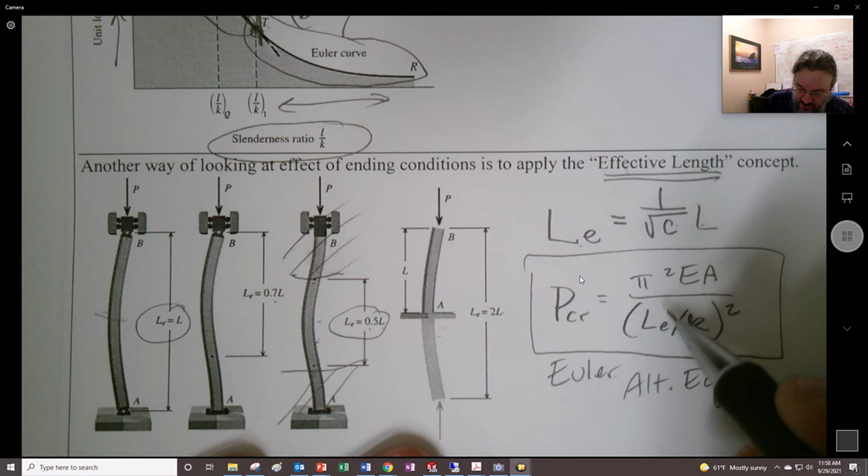All right, so that was a lot of information, but this is like buckling 101. The most important thing — this is another Euler alt equation, the alternate version using the effective length.

So in summary, when you put a load on something long and slender, it has the possibility of buckling over to the side. This is the fundamental thing that most students need to know about.